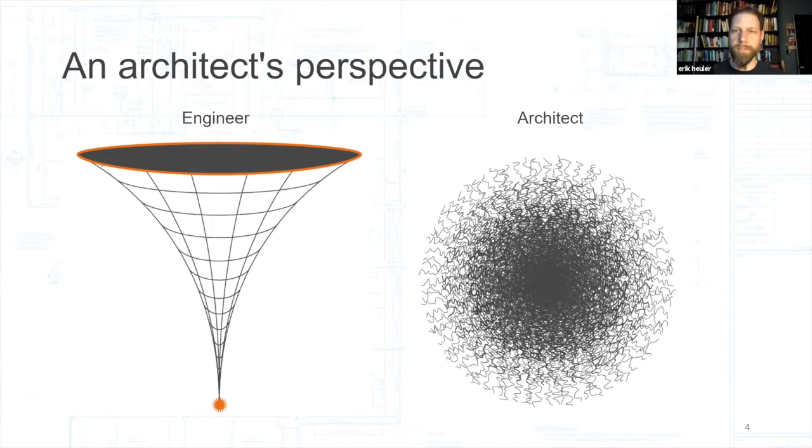So some of the things that I'm going to be sharing today are going to come from the architect's perspective, trying to tie a project together, to identify the things where different disciplines will have synergies when working together. So part of my goal here is to identify those things and how the team dynamic is important. We have our individual expertise, but really working together is key.

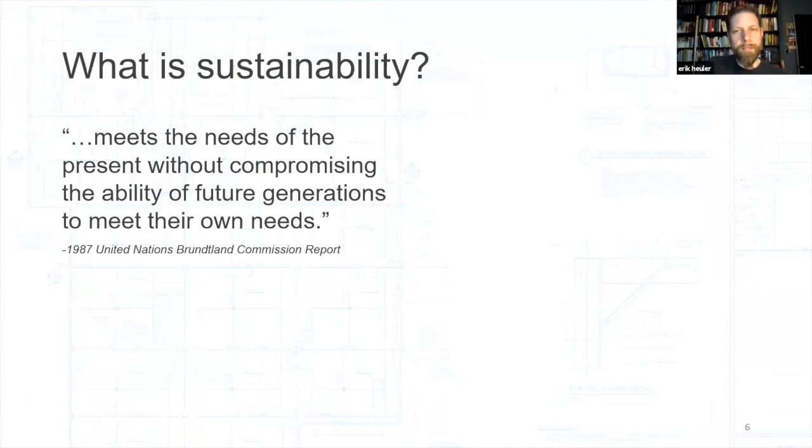So I know this is a sustainability master's program, but I think sometimes it's nice to step back to the fundamentals. What is sustainability? This is kind of a widely accepted definition from the Brundtland Commission, right? Meeting the needs of the present without compromising the ability of the future to meet their own needs. So we can talk about what needs, right? And we can go to Maslow's hierarchy. Are we looking at our basic physiological needs, self-actualization, something in between there?

I think really the point here is that sustainability is necessarily large in scale, right? Sustainability cannot exist within a single building, even though I'm going to be talking about LEED, which certifies buildings as being sustainable. We really need to connect scales. We'll talk about that a little bit too.

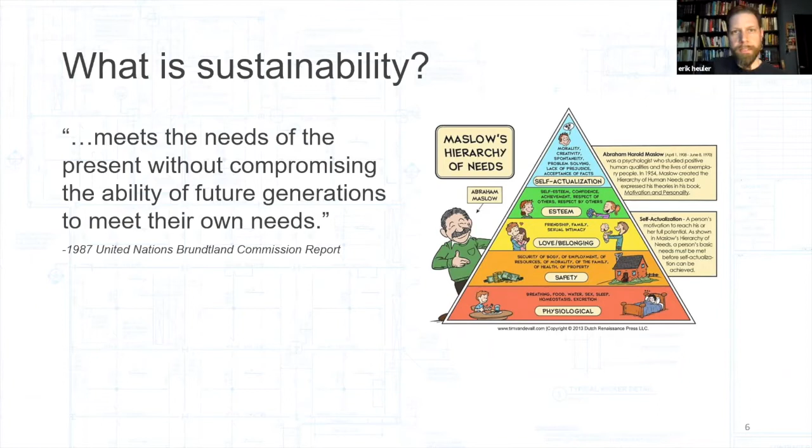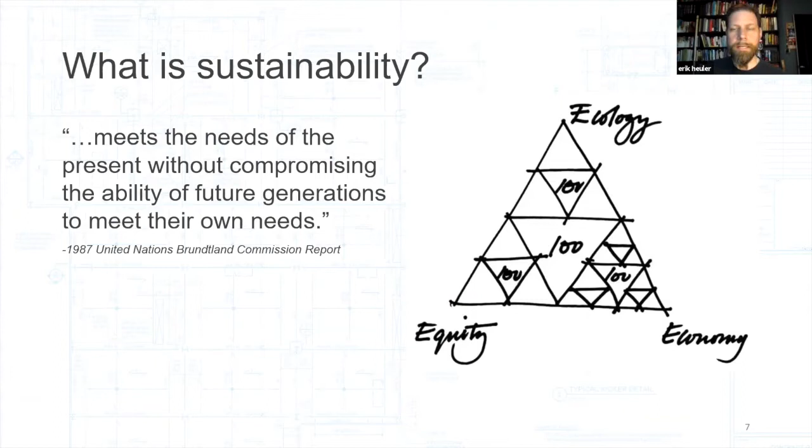So this is our goal with sustainability, and of course, I'm sure everybody knows about the triple bottom line. Economy, we live with economy every day. Ecology, which I think really gave birth to sustainability, and equity, something I think this past year has really brought to the forefront. So I'm going to try to touch on that a little bit too.

And their mission when they started was to transform the built environment and transform the industry. And I think they've succeeded in that in a lot of ways. There's things 20 years ago we weren't talking about, we didn't know about. Nobody was talking about VOCs 20 years ago. We didn't really know what commissioning was for buildings. Right now probably more Fortune 500 companies have sustainability directors; they didn't exist 20 years ago.

I should also point out that LEED certifies buildings, and there's a professional accreditation for individuals, for professionals. As you may have noticed, I'm a registered architect in New York. I'm also a LEED AP, a LEED accredited professional. So buildings are certified, people are accredited. That's always a key thing. When you're meeting with people, they ask if you're personally certified, and well, I'm not a building, so I don't get certified, right?

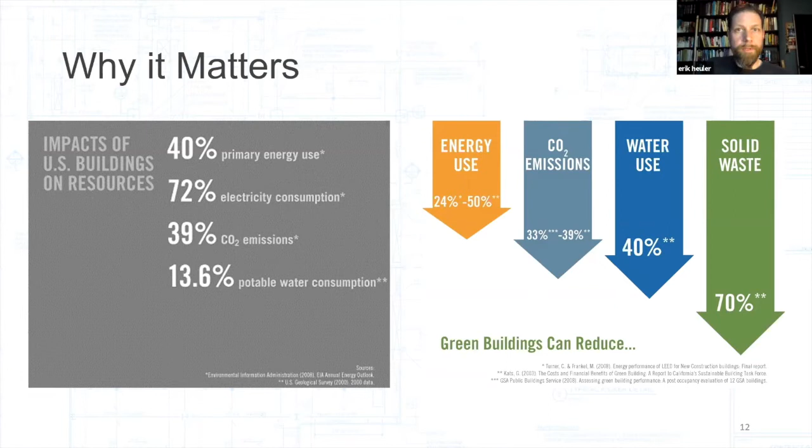Why it matters: well, buildings are ubiquitous, right? We're all sitting in a building now, most likely. I mean, it's a beautiful day out, so maybe some of you are outside. But we're inside basically 90% of the time, if not more. We live, we work, we study, we have fun inside buildings. Buildings are responsible for a large amount of our resource use and our waste generation, solid waste, CO2. So there's a big opportunity here for improving our lives, not just our buildings.

Water is a good example. Water here in the Northeast is a very different resource than it is in the Southwest. The original versions of LEED treated it the same way regardless of where a project was located. So the regional priority credits try to address that, awarding additional points for credits identified as a priority in the region where the project is located.

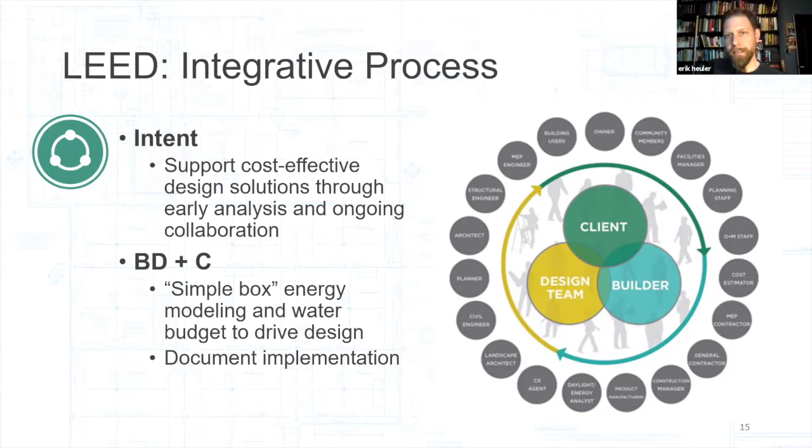We can go back to our indigenous roots and vernacular design. These structures weren't designed using computational modeling, but in a sense they were designed using the integrative process. There were project teams—people who built these structures who were intimately knowledgeable about their context, about the materials available, and about what they were trying to accomplish, like protecting themselves from the elements or from other threats in the area.

It's something we try to do, but unfortunately it doesn't always happen, especially with private projects, where a private client is more concerned with schedule, or more concerned with what the building department says than with what the community says, which is unfortunate.

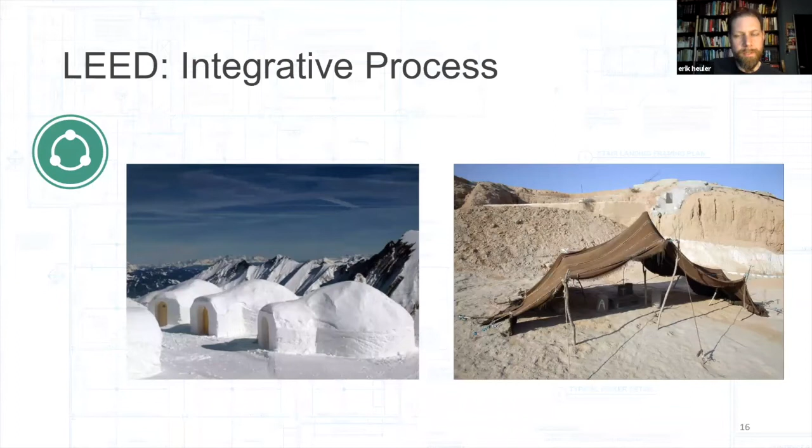It shows where we're making our decisions, typically in the construction documents phase—the design phase is over, but we're still making decisions. If we push that decision process earlier, when the cost of making those decisions is less and the ease of making them is greater, we really benefit the project. Even though it seems like more effort upfront, we benefit economically, and hopefully environmentally and equitably as well.

I'll share a couple of examples of this process at work. A classic case study is an office design project where the interior designer asks, what happens if we paint the ceiling the brightest white we can find? With modeling software, we can say, okay, now we can reduce our lighting within the space by a third, because the reflectance of the ceiling makes the lighting we include more efficient. And with less lighting, what does that do to our air conditioning? Can we downsize our air conditioning system because we have less heat gain from the light fixtures?

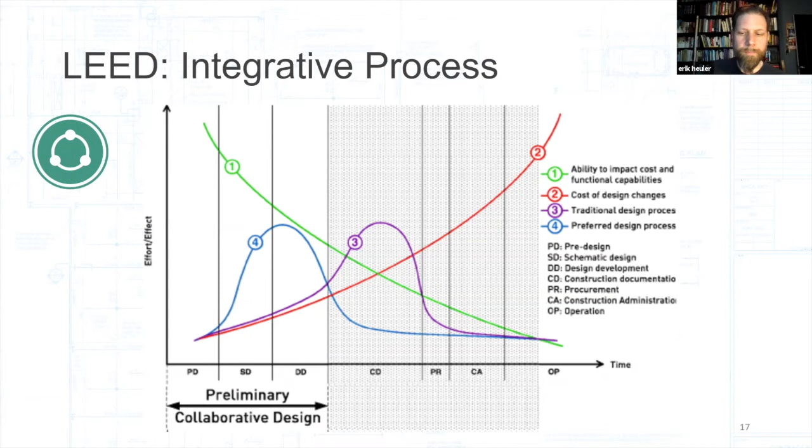Without integrative design, and without individual expertise being communicated between the team, you wouldn't find that changing the paint color influences the size of your HVAC equipment. That's really the key to this process. Another example I'll share is a project I worked on where it's really about communications.

So during the construction of the project, it was a private developer, so we weren't as much involved in the construction phase as the design phase. But during the construction phase, the contractor spoke to the owner and said, hey, I can save you money on your HVAC equipment by using a different type of equipment.

The kind that was designed is overkill for the space. And the owner says, like most owners would say, why wouldn't I want to save money? Sure, I want to save the money. Unfortunately, the equipment was designed because the utility,

PSEG, this is the Long Island project - most of the projects I'll be showing you are from Long Island - but the utility offered rebates for high efficiency equipment over standard efficiency, and that rebate would have covered much of the cost premium for the high efficiency equipment. The owner wasn't very happy about that once they found out at the end of the project that the equipment wasn't getting rebated as was expected.

And not only that, but they're not going to see the energy savings throughout the life of that project. That was probably partially on us because we didn't communicate with the build team well enough, or with the owner, that these decisions were made not just because we wanted high efficiency equipment, but because of all of the factors involved - the triple bottom line again.

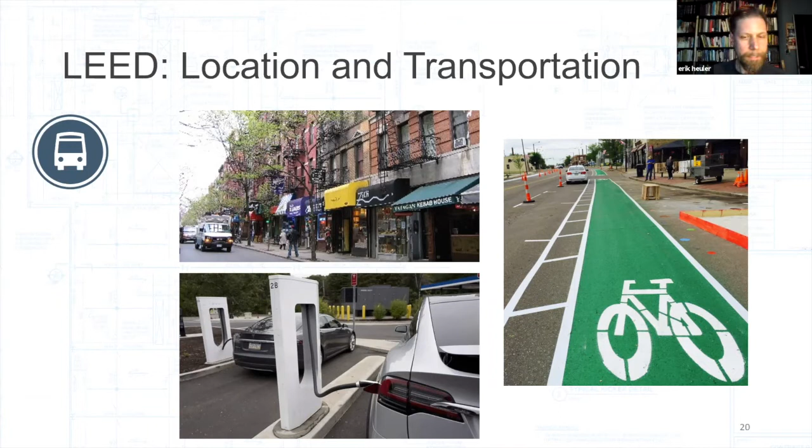And this is a project at H2M. It's actually a LEED ND, a LEED neighborhood development project. One thing I wanted to touch on is that on these slides, when I introduce the credit categories, they have the BD&C, which is building design and construction - that's for new construction, major renovation. And the O&M is operations and maintenance, so there's a separate kind of LEED certification for existing buildings.

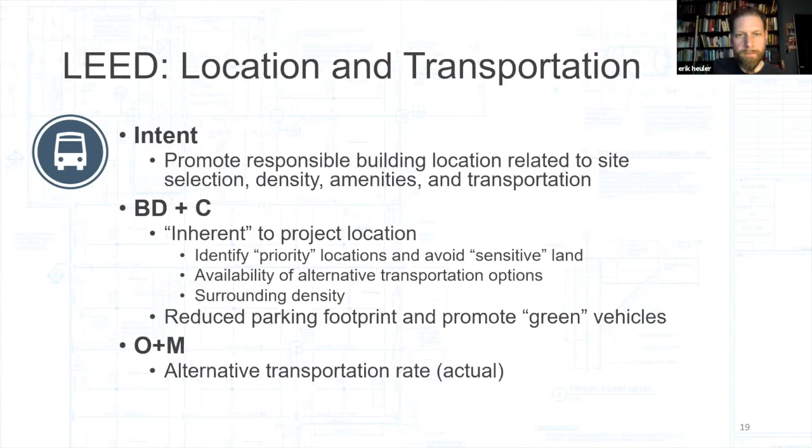But this is the Ronkonkoma hub. I don't know if anybody is familiar with Long Island - Ronkonkoma is about in the middle of the island. It's one of the main transportation lines of the Long Island Railroad. It's the station you would go to if you were going to the MacArthur Airport. I've commuted from this station for a couple of years at a previous employer.

It's largely suburban residential, but this new transit-oriented development, which is partially complete and I think still under construction, has dense residential, retail, commercial spaces, even a hotel. It's kind of this illustration of identifying the location, the existing infrastructure, and it provides a clear transportation link into New York City, which has a lot of employment opportunities. People don't necessarily want to have a car and still live on Long Island, which is difficult in the suburbs. This is an example of where you could do it.

But there's a lot of green infrastructure, green roofs, bioretention, things like that. I will talk more about rainwater management with the site credits.

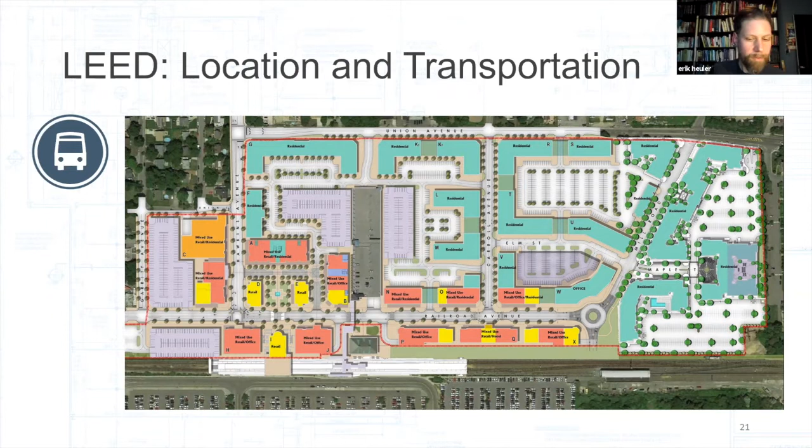But one of the credits that was criticized, probably from the origin of LEED, was that you can get a credit for a bike rack, right? That was the statement - I can get a credit for a bike rack, or I can get a credit for putting solar panels on my roof. And it's more or less correct, but there was more to it than just a bike rack.

You had to provide a changing room and showers for people that would use bikes. LEED, to address that criticism, now requires projects to gain that credit to be connected to a bicycle network. So you can't just say that we're providing bike storage and changing facilities - you have to show that your building would actually be used by people on bikes.

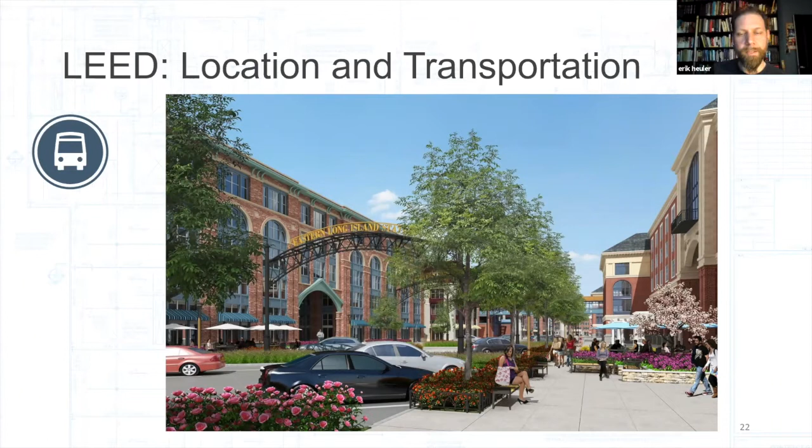So that's also kind of touches on our scale, changing in scale and addressing larger scales. I mentioned earlier, sustainability is necessarily large scale. So when you start to identify infrastructure, like bicycle infrastructure, alternative transportation infrastructure, that's beyond your building, beyond your project, then you're starting to connect with your community. We'll talk about that shortly.

So now sustainable sites, this is where you're developing your site. You're assessing your site, identifying the natural flows—sun, wind, water, surface water, subsurface water—and really identifying where the prime development site is in harmony with the natural flows. You're also going to try to provide open space. I think the existing context is relevant for that. The reduction of light pollution and the heat island effect.

And this is where LEED starts to address that scale jumping as well, which is how the Living Building Challenge puts it. Living Building Challenge has a whole level of their certification where you can connect scales, going from building to region.

So for the sustainable sites credit category in LEED, for the existing building operation and maintenance, there's this community sharing of facilities credit. That would be like, for instance, a school building has an auditorium that they use on occasion, but they'd be able to connect with maybe a local theater group that could use the auditorium after school hours or on weekends when the school isn't using the facility. So you start to address community scale with the use of your building—it's not just isolated within your property boundary.

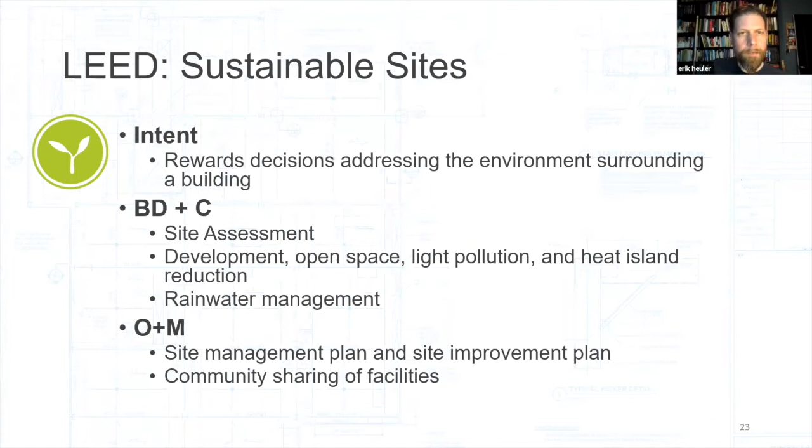So this is a project that H2M worked on. It's not a LEED project—it was just a parking lot for the Planting Fields Arboretum. It's a nice parking lot, as parking lots go, and I think it addresses a lot of the things that LEED brings up. You see a nice amount of plants here. You're seeing landscaping more than you'd see in your typical parking lot, providing a lot of shade. The whole right side of the photo is a shaded parking lot.

The light fixtures are designed to be dark sky compliant, reducing light trespass beyond the property and into the sky, which is beneficial to us and nature. And it's all pervious pavement here. So instead of having dry wells scattered throughout the site, where the rain falls it can seep into the ground, kind of more matching the natural hydrology of the site.

One thing with pervious pavement is that you have to make sure the facilities managers, the clients, are aware there is additional maintenance required—ongoing maintenance, and even during snow season when you're clearing snow, not to use sand. Because essentially pervious pavement is the same pavement but without the fines, without the sand. So you don't want to use sand during snow removal, and if you do, there's additional maintenance—you might have to vacuum out the site to remove those fines, to make sure it's still functioning as designed.

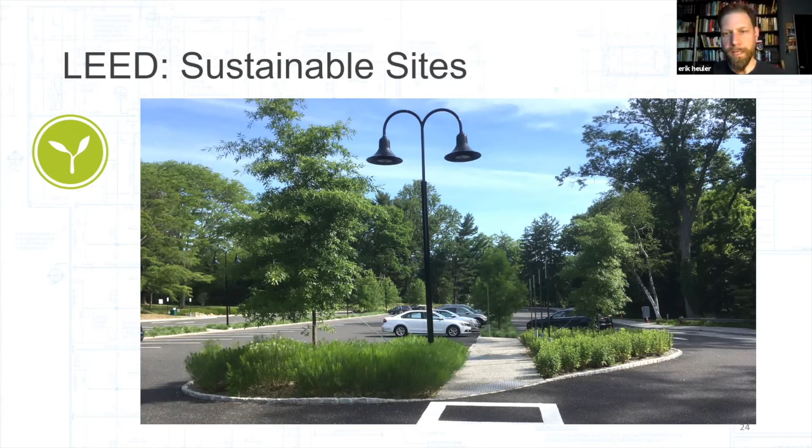So this is, I mentioned regional priority credits earlier, and this is a regional priority credit for Long Island because of stormwater runoff and the damage it can do to our surface water bodies. This is a map of the Long Island Sound—a little outdated, but I'm sure things haven't changed a whole lot. It shows the dissolved oxygen in the water, and you can see where there's more development, you're getting lower dissolved oxygen rates.

So what's happening is that as water runs off from our impervious surfaces, where it's not seeping into the ground, it's taking with it all the pollutants and fertilizers and things like that, and it's washing into the waters. It causes algae blooms, which then suffocate the rest of the marine life, reducing that dissolved oxygen.

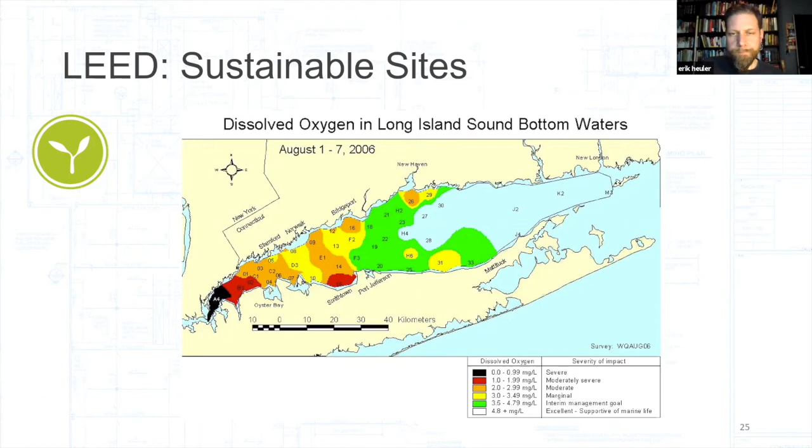Water efficiency—this deals with interior and exterior water use. Water, as I mentioned earlier, is another kind of regional issue. In the Northeast, we have an abundance of water typically; other areas of the country aren't as lucky.

But one thing to keep in mind is that water use isn't just about the water—it's also about energy. One of the largest energy users here on Long Island is the Suffolk County Water Authority. Water requires a tremendous amount of energy to treat and to pump. So water is not just a water resource issue, it's also an energy, carbon emissions issue.

For indoor water use, we're seeing low flow water fixtures are available even at Home Depot—you can buy a dual flush toilet and low flow fixtures.

For exterior water use, we're really looking at irrigation design or landscape design that can reduce the need for irrigation. A couple things to keep in mind: some municipalities require irrigation for commercial buildings, so it's working with them using more efficient systems. This is an image of a drip irrigation system—instead of spraying water in the air or misting it, you're providing it directly to the roots where it's needed, a lot more efficient.

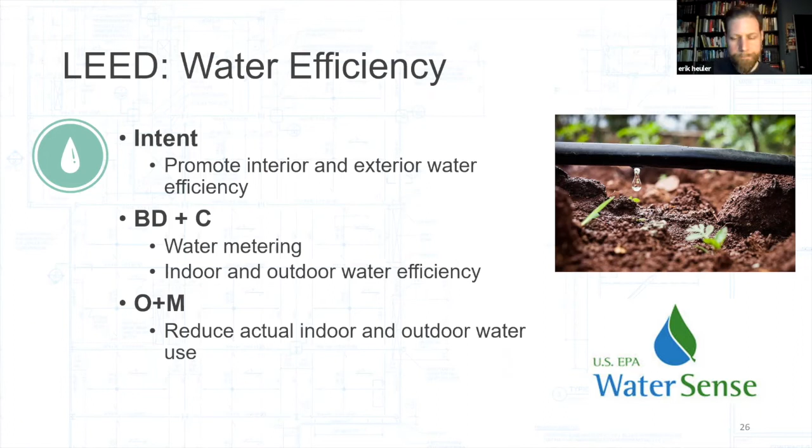This is a project at the Suffolk County Environmental Center, one I worked on prior to H2M. It was an old Grosvenor Atterbury mansion, a beautiful building that the county had taken possession of and turned into the environmental center. This was the greenhouse on the site, and we were looking to turn it into a living machine—developed by Dr. John Todd, using plants, algae and fish to break down waste. The objective was that waste from the building would come to the greenhouse as a demonstration project, serving as the sewage system for the building.

The Suffolk Health Department, which manages that area since there's no sewers there, wanted us to demonstrate nitrogen levels basically to drinking level standards coming out of the system, which we thought was unreasonable, but we couldn't meet those standards. So what we ended up doing is still providing this system, but ultimately the effluent would then feed into a standard septic system, which was accepted by the health department.

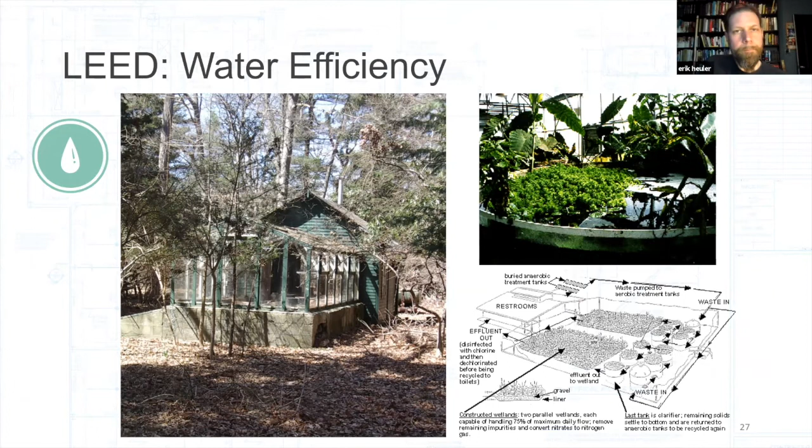This is another project, for the New York City DEP. There was a yard where they stored their garbage trucks, and they were using a tremendous amount of water because at the end of each day they would hose down all the trucks using potable water. So this is probably a 25,000 gallon rainwater cistern, the idea being to now use rainwater to hose down the trucks rather than potable water.

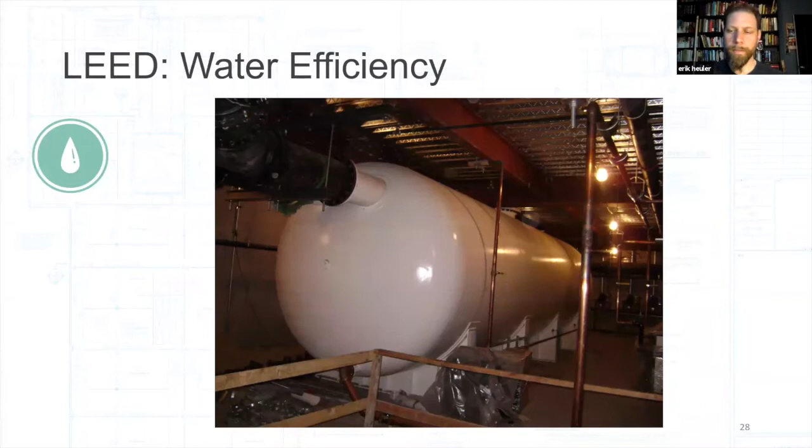This was an exciting project for H2M—again, not a LEED project, but really embracing water efficiency and water reuse. It's actually the first water reuse project in New York State: the Riverhead water treatment plant, located right next to a golf course. Golf courses, as you can imagine, use a tremendous amount of water, especially during the summer.

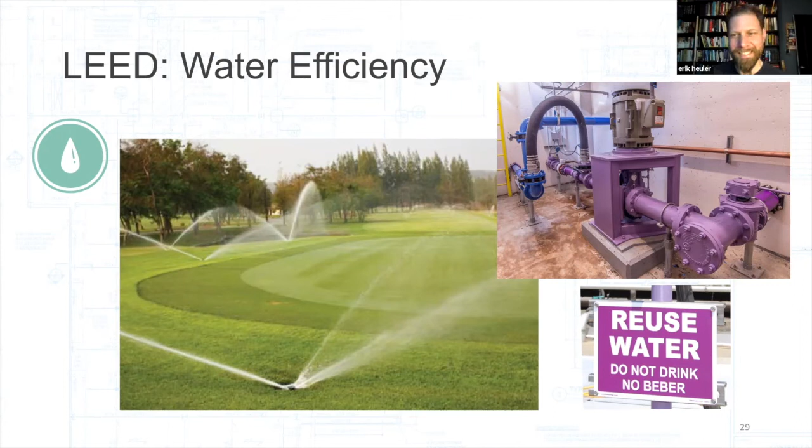So this was a collaboration between the two. The purple pipes are this reused, non-potable water—the water is treated to a certain level, not drinking level standards, but before it would otherwise be released into the nearby waterway, it's now being used to water the golf course in the summertime, somewhere in the range of 350,000 gallons a day during the high season. Not the most efficient sprinklers, but we do what we can.

So energy and atmosphere—LEED stands for Leadership in Energy and Environmental Design, so energy is right in the name, meaning LEED has to address energy. This was another early criticism of LEED: earlier versions didn't necessarily require increased energy performance. There were credits you could achieve, but no requirement. Now there's a minimum 5% energy improvement over baseline. LEED uses ASHRAE 90.1 as the baseline that energy performance is compared to.

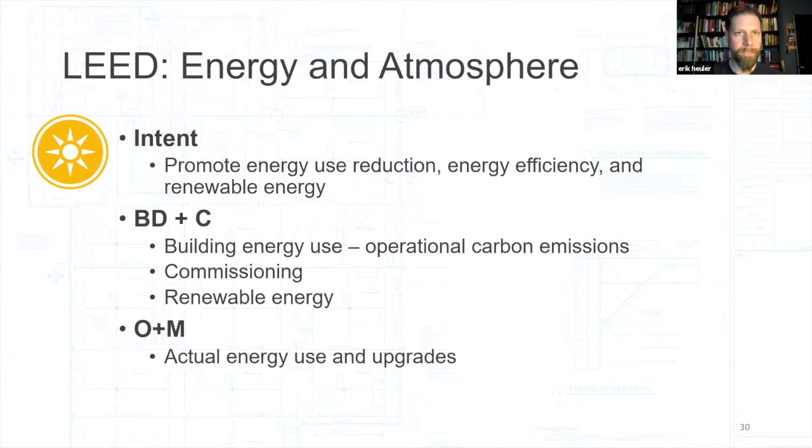LEED is used everywhere. Some states like New York and New Jersey have energy codes adopted based on the model energy codes. There are areas of the country that have adopted earlier versions of that code, so the ASHRAE standard is set as the baseline. California has more ambitious energy codes, so meeting energy code there will meet the baseline for LEED energy performance.

And it's interesting too, if you think about source and site energy use, you could make the argument that something like a ground source heat pump, which is usually touted as a sustainable energy source, if you're using electricity from the grid to run that system, that's only a 33% efficient system. Whereas instead of burning the gas at the power plant, if you burn the gas in a gas-fired unit on your site, it could be 90+% efficient. So you could argue that a ground source heat pump is less environmentally friendly than the gas, right?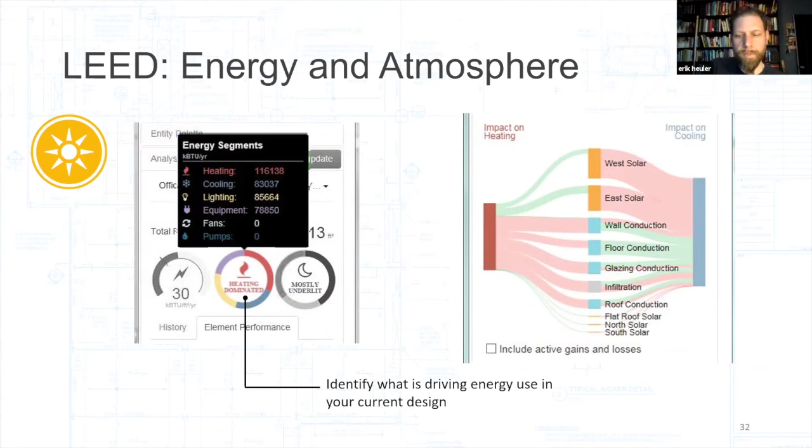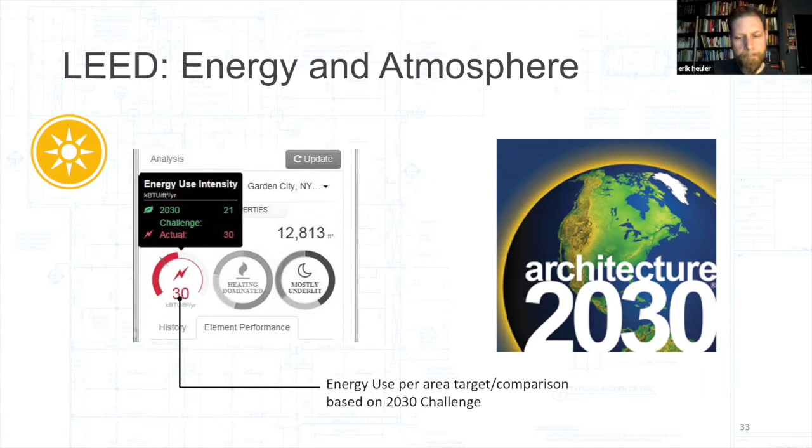And then you can identify that energy use intensity, how much energy the building is using per square foot, and compare that with targets, right? This software compares it to the 2030 challenge, but you can have your own goal set for the project. This is the same software, so you can model your building. You can do simple daylight analysis, which is what's shown on the right, showing the light and the dark spaces, and then there's a bunch of these response curves that you can generate, and you basically pick the parameters that you want to use.

This is looking at the wall R value, the wall insulation value, and it's based on energy cost, right? So on the bottom, the horizontal shows our R value, how insulative it is, and the vertical is the energy cost. And you can see if you go from R15 to R20, just for R5, you're gaining a lot of savings there. But if you look at R25 to 30, it's minimal, right? And then you start actually spending more money on energy.

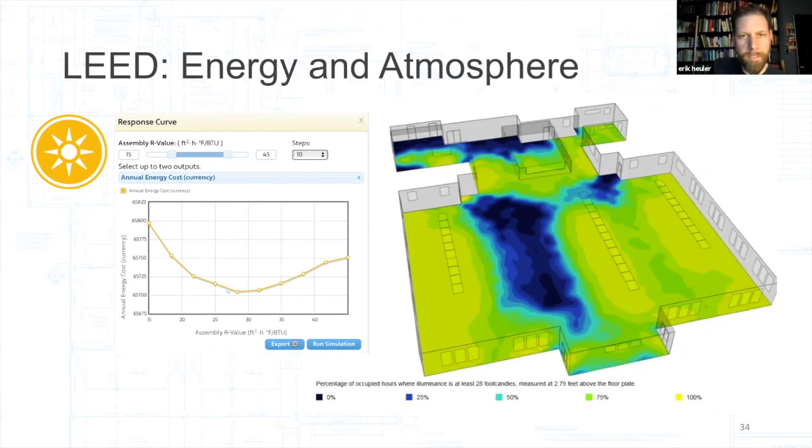So it helps to optimize your building envelope, right? And this is before we're designing systems, so that we can design those systems efficiently and right size them for the space that we're going to provide for our clients.

Commissioning. So commissioning is, I would say, one of the things that LEED has brought to the forefront, right? I was just starting architecture school when LEED came out, so I can't speak from experience that people weren't talking about commissioning buildings before LEED, but commissioning is now a code requirement in the energy code for certain equipment sizes. LEED has expanded their commissioning so now there's an option to do envelope commissioning.

We're actually making sure... so just to back up for a minute, since I don't know what everybody has touched on in your studies so far, what is commissioning? So commissioning is basically an evaluation of construction to ensure that building systems have been constructed as per the design documents, the design requirements and the owner's requirements, right?

So there'll be functional testing and inspections, things of that sort. And it's mostly for energy systems, but again, their commissioning is being expanded to even building envelope, where they'll do like a blower door test. I don't know if anybody's had that done in their home, where they'll test the leakage rates of your wall assemblies and can make corrections.

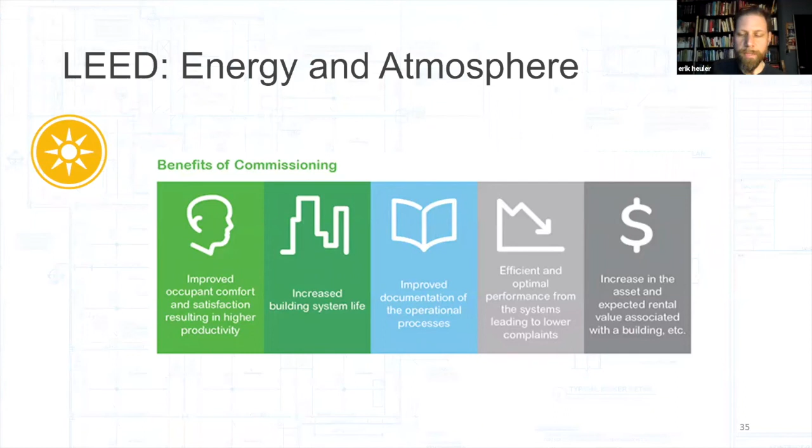But with things like that, we're now designing and building, and owners are purchasing high efficiency equipment, and that efficiency has to follow through in the construction phase. And commissioning also involves training of personnel, especially with more advanced equipment, where facilities are learning how to use it correctly. Right, so this is a great quote I love from Michael Bloomberg: In God we trust, everyone else bring data. So it kind of references the energy modeling and the commissioning, right?

I still have a couple more. I see that we're about a quarter to. I'm gonna try to speed through these a little bit more.

So with energy, we're looking at operational carbon, right? That's the carbon emissions that come from operating our buildings, whereas when we look at our materials, what our buildings are made of, we're looking at our embodied carbon. So as our buildings grow and as our energy efficiency increases, embodied carbon becomes a bigger portion of what we need to focus on. So this credit category looks at that. It looks at environmentally preferable materials, and also construction waste.

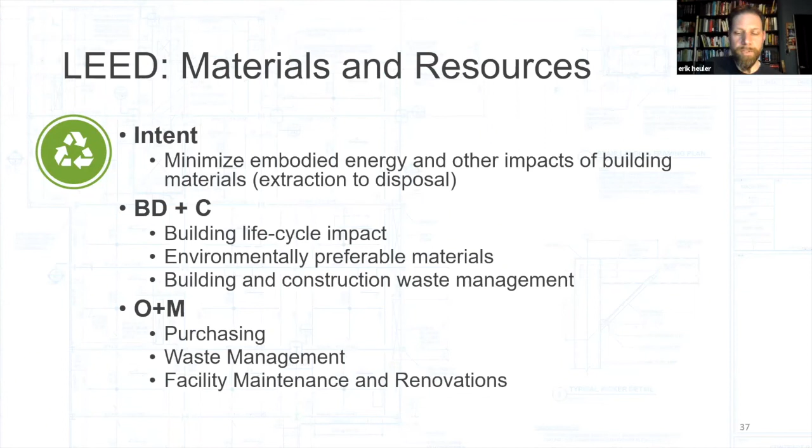So construction waste is another thing that LEED has brought to the attention of contractors, right? This is not an unfamiliar sight now at job sites, where contractors are sorting their waste on site so that we can divert the waste from the landfill. A lot of contractors have expressed that they've seen this as a cash positive change for them. Now they're really able to sell back this valuable, what we call waste. William McDonough talks about waste, and in nature there is no waste. Waste becomes a food for another process. So we're trying to emulate that.

With the more recent changes, with China not really taking as much of our recycling, where much of it goes, we haven't really seen an impact yet for construction waste, but we'll see how things go. This year hasn't been the normal year for construction.

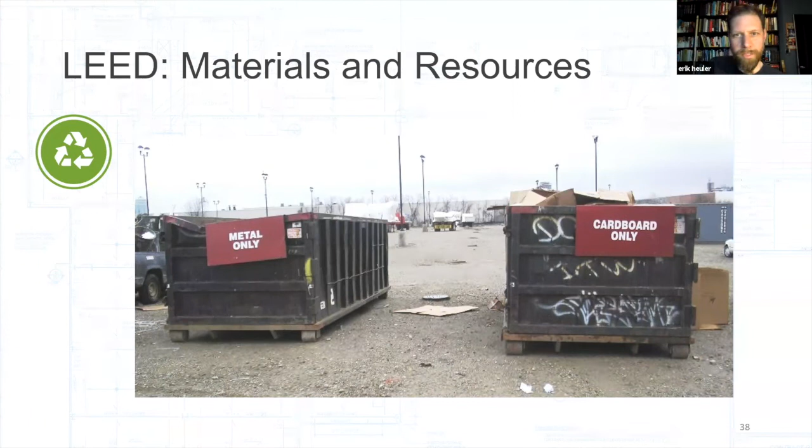So here's that embodied and operational carbon graph. You see the yellow orange bars represent the embodied carbon. That's all the carbon that's needed to provide the materials: our material extraction, manufacturing, fabricating, or transportation to the site. And the operational carbon, the bluish, is our buildings operating, how we're running equipment, HVAC, computers, all of our stuff inside the building. And we could see for this 30-year period, we hit that point where the operational carbon surpasses the total embodied carbon. This is from 2020 to 2050. This graph is provided by Architecture 2030.

And Architecture 2030's goal is that by 2030, our buildings will be operationally carbon neutral, or carbon negative. So that means that the operational carbon in this graph is gonna drop down when we get to that 2030 mark. And you could see at that point, embodied carbon is 3/4 of our total carbon footprint. So to look at this, we need to look at our materials. We're seeing more advances in timber frame construction, with heavy timber construction, even for skyscrapers and high rises, and looking at material reuse, regional materials. That's something that's always been big with LEED, promoting regional material sourcing.

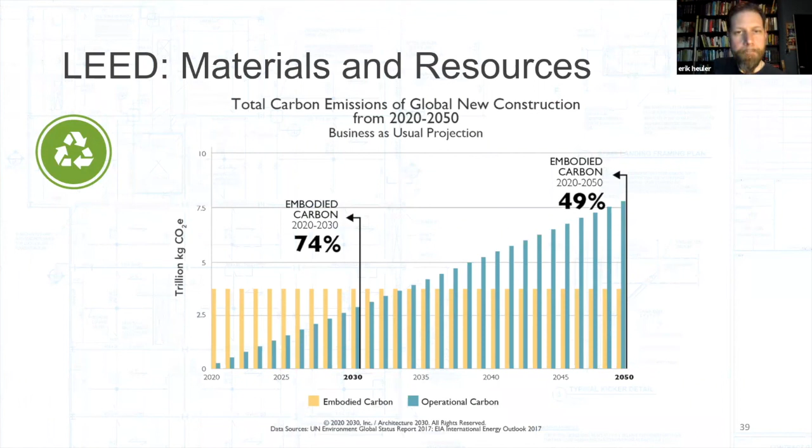Also material labels, right? FSC is the Forest Stewardship Council for responsible forestry. We're seeing more material transparency, where companies are listing the ingredients, right? The Declare label here. This was created by the Living Future Institute, which is the creators of the Living

Building Challenge. So this lists all of the ingredients within a product, and it highlights those that are either materials of concern or what it calls red list, which are those that are known to be harmful to humans or nature. And there's a requirement now that in living buildings all the materials must be red list free. It's somewhat difficult to find some of these, but it's becoming easier and easier every day. More material manufacturers are making materials available and making the information about these available.

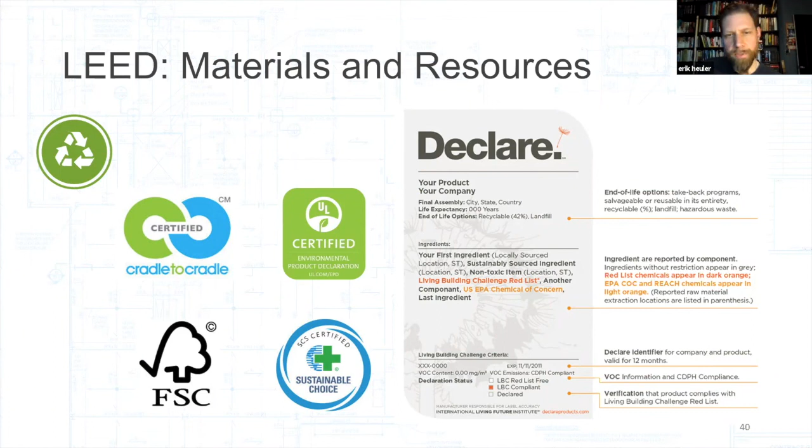The environmental product declarations are kind of like a life cycle assessment. They're typically cradle to gate, which means from material extraction to basically install into a building. It doesn't necessarily deal with maintenance or disposal after. So we've still got room to grow and advance there.

Indoor environmental quality, this is the last credit category. So we'll have some time for questions. And this is again with COVID, this has become more of an important topic, I think, for people. And things like WELL Building are addressing these directly, but it's also about the materials that we're using, right?

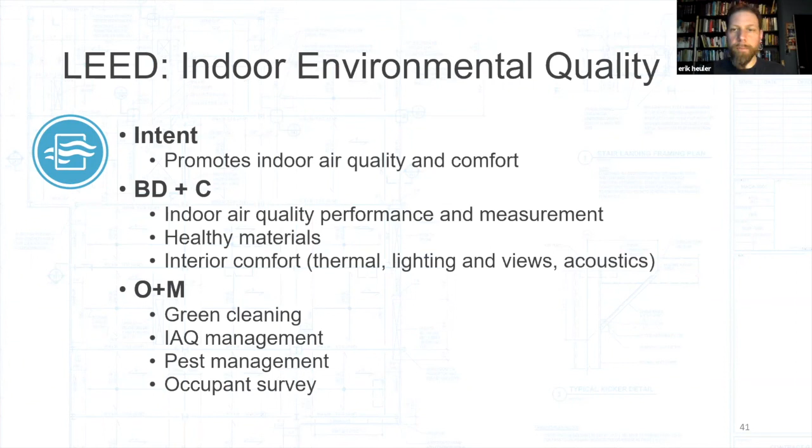So in California, there's Prop 65, and it basically says that any buildings that contain materials that are harmful have to be labeled. So even in Disneyland, here's the sign in Disneyland that states that there's chemicals known to cause cancer and birth defects. There was a study by, I think it was Perkins and Will, probably 10 years ago or so, where they were looking at, can we design an office space with available materials at the time that wouldn't require this label? And they found at that time that there wasn't enough commercially available finished materials to not put toxic materials in our spaces.

This is changing, right? So the environmental product declarations also now have health product declarations, which are really more focused on environmental health and human health and toxic materials in the materials that we're using in our buildings. So we're seeing more of these labels and these third-party verifications that guide us to more healthy building materials.

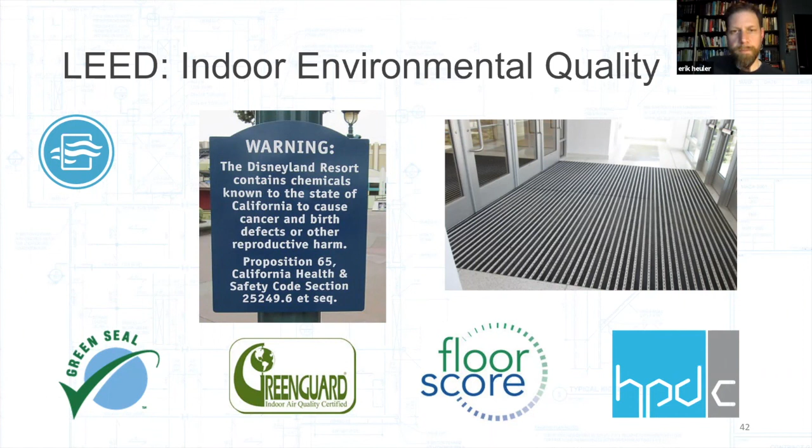And indoor environmental quality is more than that, right? They say that the two biggest complaints in a building are it's too hot and it's too cold. So obviously thermal comfort is something we're concerned about, but also lighting, daylighting, access to nature; just a window with a view provides tremendous benefit.

There's now lighting that mimics daylight to address our circadian rhythms and how we've evolved to respond to nature. In our hundreds of thousands of years of existence on Earth, we've only lived the past 100 or so not outside and connected to nature. So we have to kind of reconnect and retune ourselves.